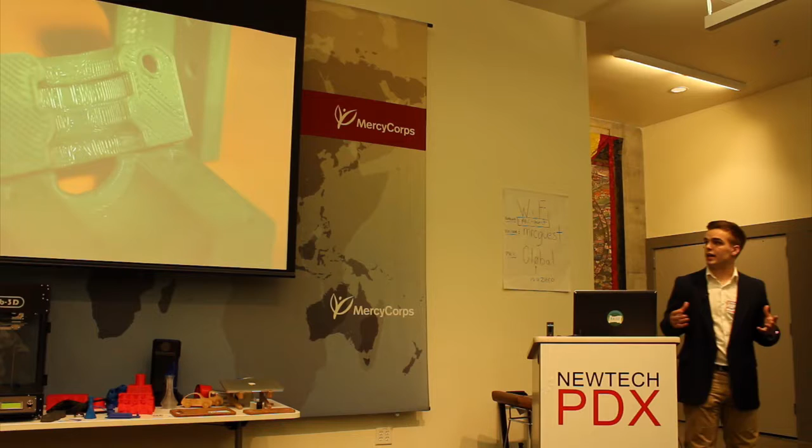Traditional 3D printing is really cool, really flexible, really easy to use. But if you look at the parts, a lot of them come out kind of rough. It's more of an approximation, and the accuracies and surface finishes just aren't there yet, specifically with FDM 3D printing.

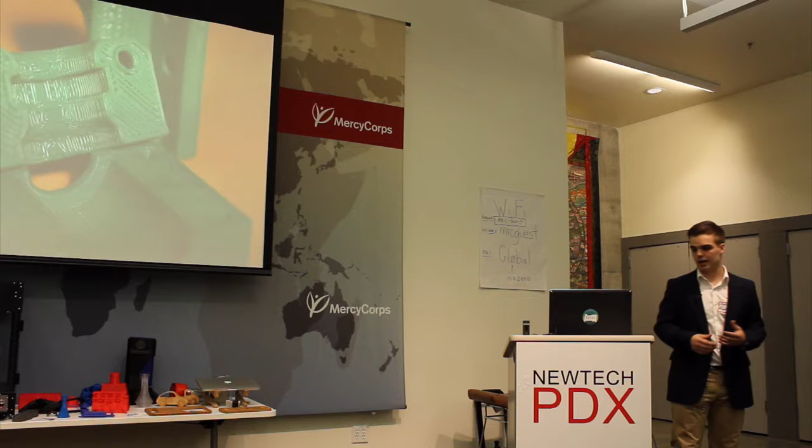On the other hand, CNC machining is really capable. We're able to machine things to incredibly precise finishes and accuracies. But running a CNC tool is its own career—there are professional CNC machinists, and the CNC machines often cost large sums of money.

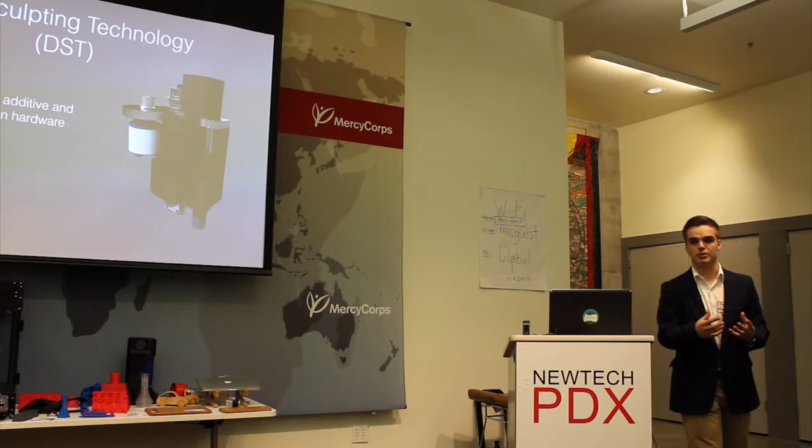So Fused Machines thought maybe we could marry these two, and we created a technology we call dual sculpting technology—the intelligent integration of additive and subtractive processes in one tool and one piece of software. At any time during the printing process, we're able to come back and machine away those inaccuracies, so all those little parts and areas you don't want start to go away.

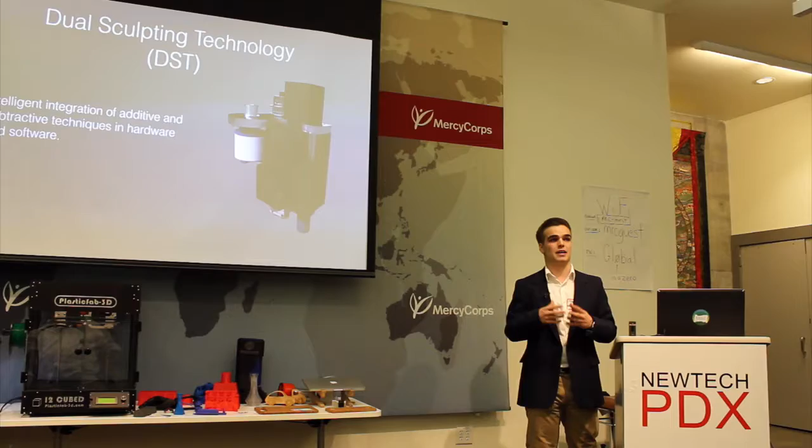Our customers are really interested in the technology, but what they really want is a solution. So I want to introduce you guys to the Orsus, sitting right here. The Orsus is the world's first desktop dual sculpting manufacturing platform. This means you can get machine-grade results on your desktop with all the ease of use you're used to getting out of a traditional 3D printer.

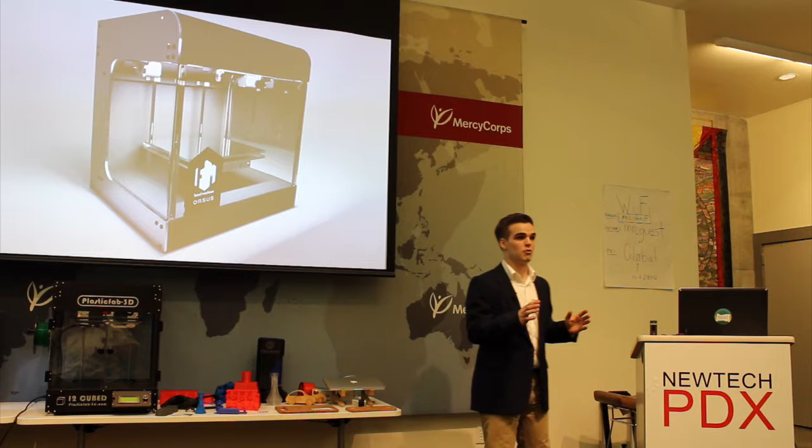I have to admit, I told a bit of a white lie in the beginning of this presentation. This part wasn't machined by a CNC machine—it was actually machined on my desktop, on my Orsus. We're able to get results that are really different from what people are used to getting on a 3D printer, and we're really excited about what that can mean.

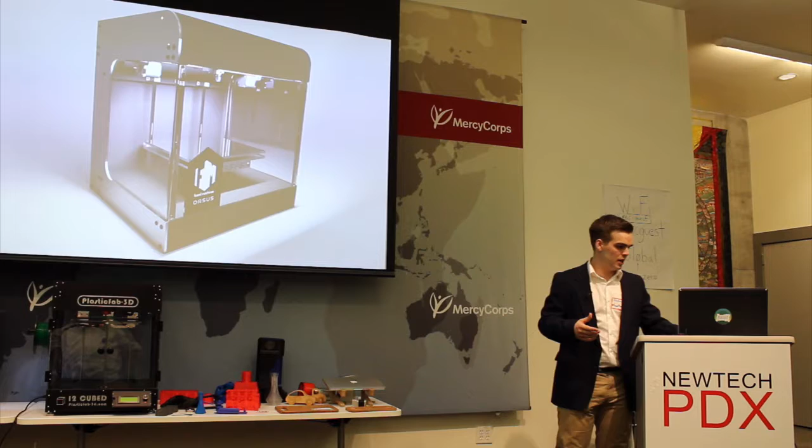So what exactly is the Orsus? Well, it started off with a really world-class 3D printer. We built this printer from the bed up, which meant we had to start rethinking everything—we have a precision ground piece of aluminum, cast to prevent warping.

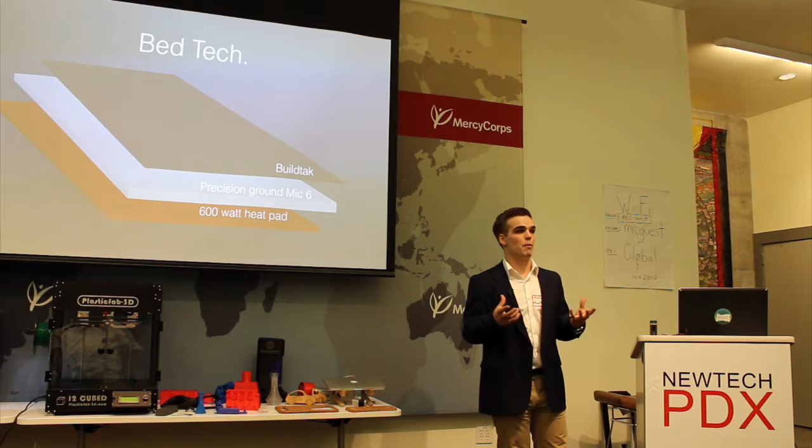We have 600 watts of heated bed power, as well as a Buildtak layer, which is basically a third-party surface that makes printing way more reliable. All this is in an effort to make failed 3D prints a thing of the past, because anyone who's 3D printed something has had them fail. That's just not what we want.

Now, combined with our all-metal hot end, we actually print in a full enclosure, just like Plasticfab does. That creates a microclimate which allows the materials to not warp as much, not experience as much stress. So we're able to print not just in PLAs and ABSs, but also nylon and polycarbonate, which is the same stuff bulletproof glass is made out of. We're really working on pushing the limits of what people think they can do with this technology.

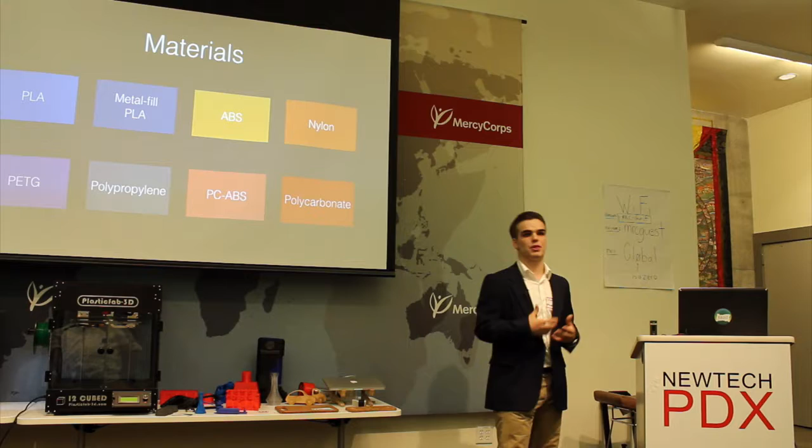But it's not just a 3D printer. The Orsus also has a 150 watt CNC spindle in it, so we can machine wood, plastics, and my favorite, etch PCBs. Imagine you're making a project—you can design the circuit board as well as the 3D printed parts and make them all on one machine on your desk.

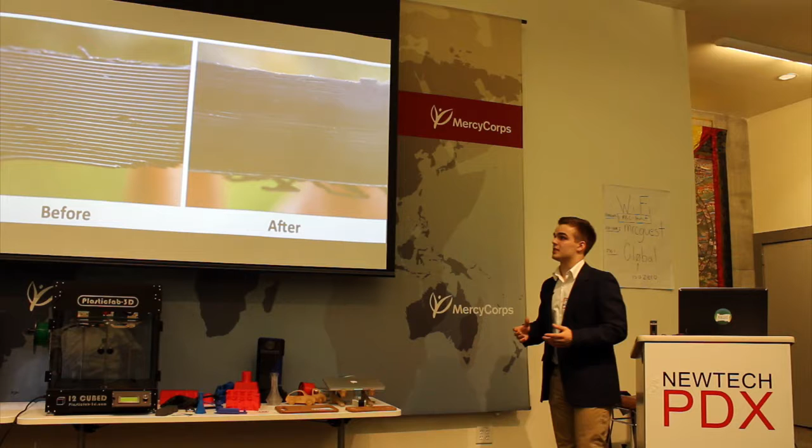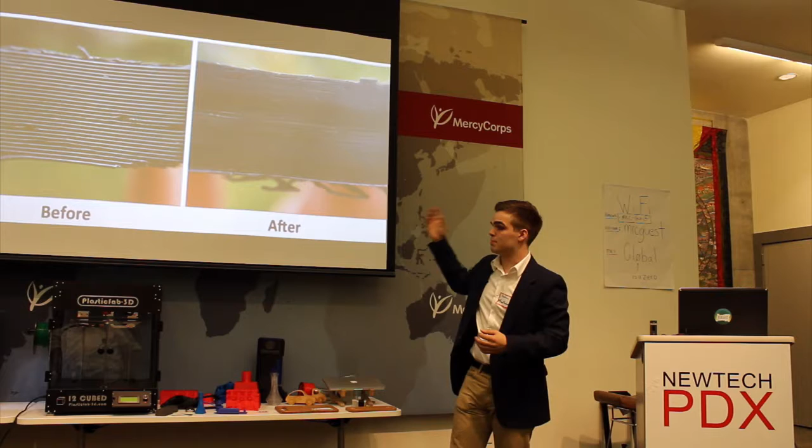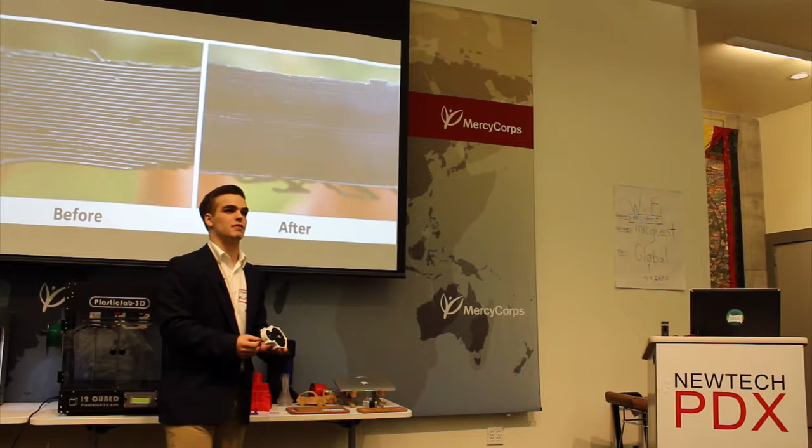But perhaps the true power of the Orsus is using this dual sculpting technology. On your left we have a traditional 3D printed part, and on the other side a part that's been dual sculpted. Instead of a rough approximation, I can create incredibly precise parts. This gearbox is toleranced to 5/1000ths of an inch—that means you can get the same tolerances out of a machine shop, but sitting on your desk.

So I guess that means enough talking—I'm going to try to do a live demo. Anyone who's done 3D printing before knows this isn't always the easiest. It's going to start in a second, but it's quiet enough that we can keep talking. It's moving—yeah, this is a video you guys can watch.

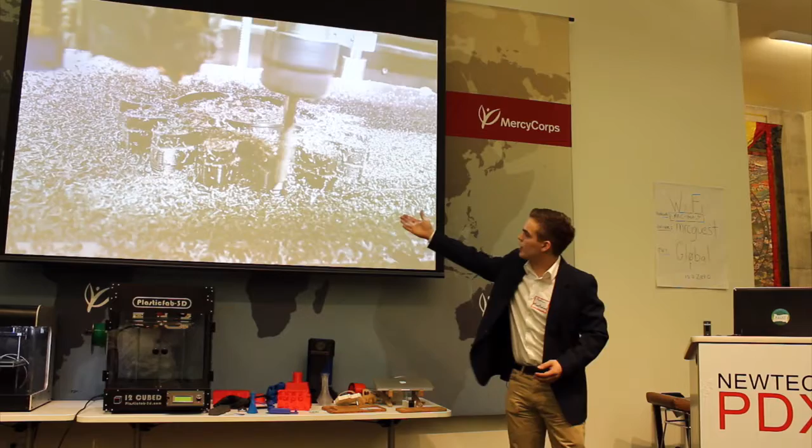This part was printed earlier—it's one of the parts you saw in the gearbox. It's been printed, and now it's actually returning, and you can see it shaping away those layers. We're not getting parts anymore that are layers with little imperfections—it's actually a machine quality part.